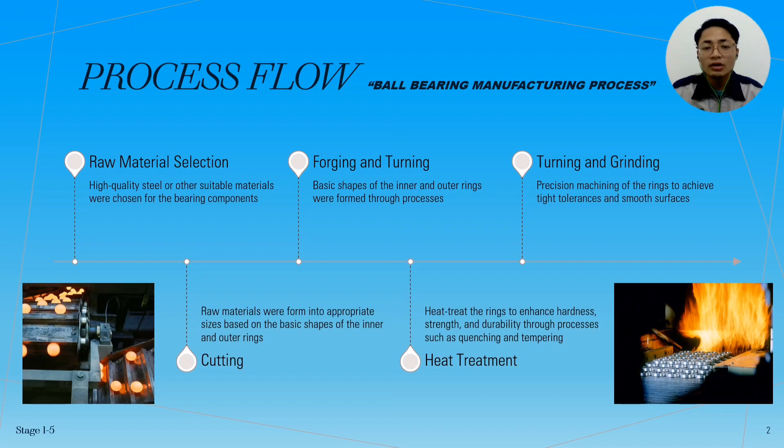The ring undergoes turning and grinding operations, achieving tight tolerance and smooth surface, and the use of coolant during grinding is one of the key aspects in maintaining optimal temperatures and preserving the integrity of the component.

Then they begin the assembly process by bringing together the integral components of inner and outer rings, ball bearings, and cages, and this assembly process is carried out manually by hand. SKF's skilled technicians carefully place the ball bearings into the assembled rings, ensuring even distribution. This step is to guarantee smooth and reliable operation of the bearing.

For those bearings that require it, they proceed with cage installation. The cage serves a crucial role in maintaining proper ball spacing, preventing friction, and contributing to the overall efficiency of the bearing.

To ensure continued functionality of the bearing, they introduce lubrication. This involves application of grease, an essential step in minimizing friction and wear. They also add a layer of protection by sealing the bearings, an extra layer to shield from contaminants and safeguard the internal components.

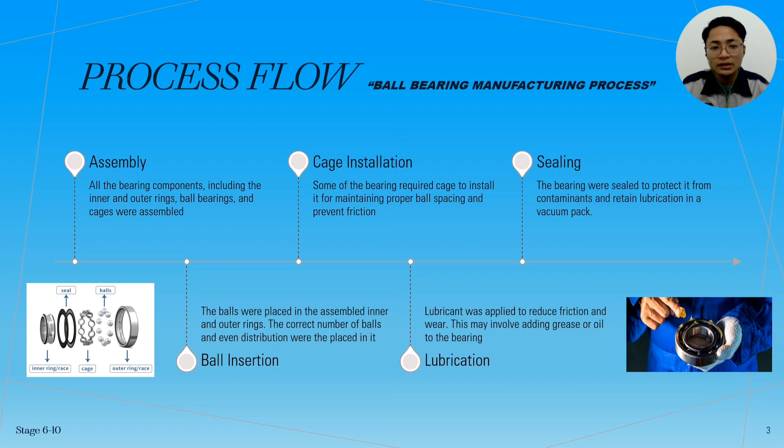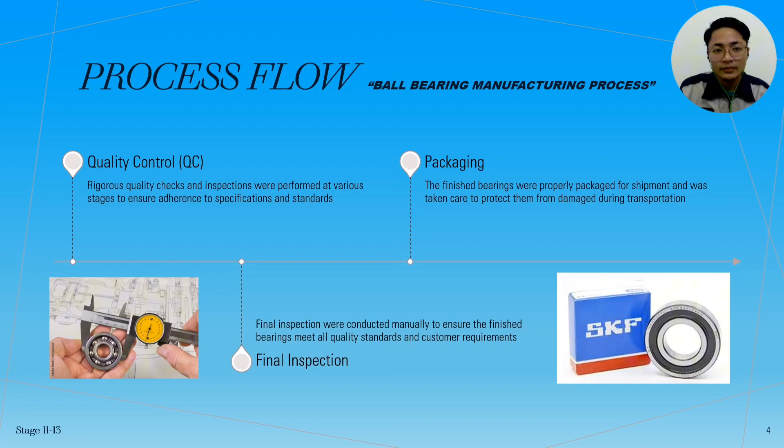Throughout the process, they perform rigorous quality checks and inspections to ensure the specifications and standards set by the company are obtained. In the final stage, they manually inspect the product themselves, and after that continue with the packaging process to shield it from potential damage during transportation. This is basically the complete assembled product of a ball bearing, stage by stage, as you can see in the picture.

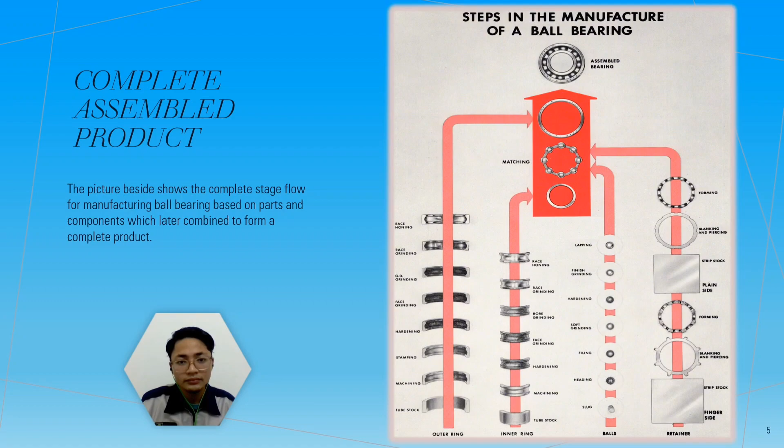For design concept, SKF designs bearings tailored to specific applications based on customer demands. For precision manufacturing, they include advanced machining to achieve tight tolerance and surface finish for optimal performance. For environmental consideration, they also use eco-friendly material and reduce waste as much as possible.

For quality assurance, they use a Tateyama machine for vibration testing of the bearings, and also implement strict material traceability to track the origin and characteristics of the component, such as serial numbers that can locate the manufacturing location and dates. The company also provides training and certification programs for employees to maintain high skill levels and ensure consistent quality in manufacturing. That's all for me, thank you.

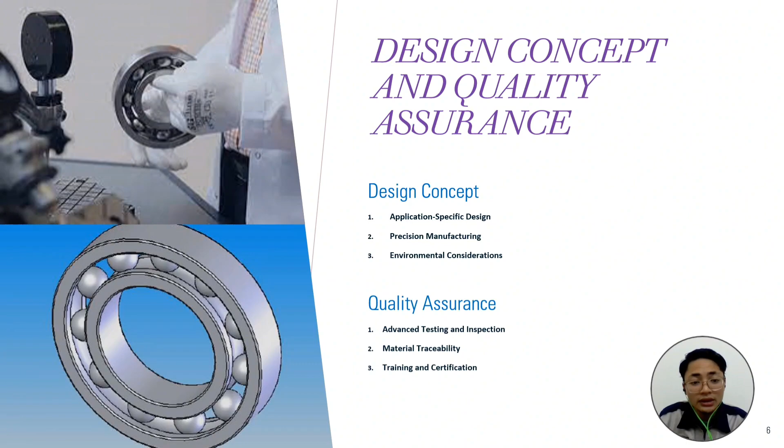My name is Muhammad Syamil bin Nazri, and I would like to talk about the SKF products. Their main product is the split roller bearing.

The design of SKF's split roller bearings makes them beneficial for inaccessible applications where mounting, dismounting, and maintenance is a challenge, for example between the head pulley and gearbox or motor. They are also highly suitable for long shafts which require support at several positions, or on cranked shafts. Split roller bearings are the ideal solution to reduce machinery maintenance and repair downtime. They are typically mounted in a cartridge that fits into different kinds of housings, yielding a complete unit.

SKF Cooper split bearing units can be disassembled into smaller components, easing the task of lifting and handling and making mounting or replacement simple even in the most cramped and inaccessible conditions. Clearances are preset, so there is no requirement for any on-site adjustments or specialized fitting tools.

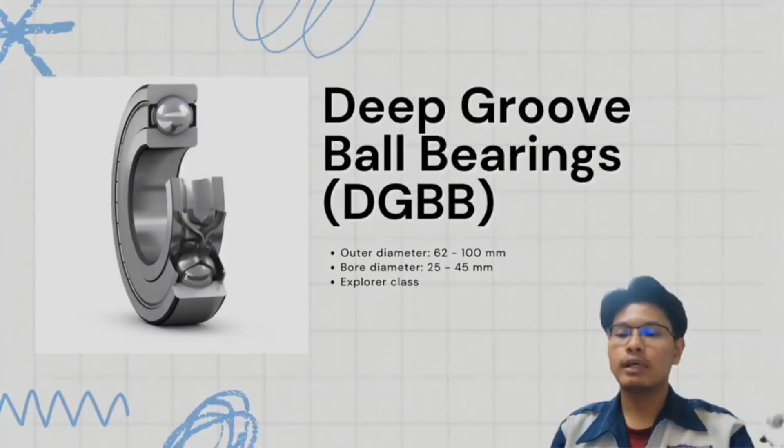Deep groove ball bearings are the most widely used bearing type and are particularly versatile. They have low friction and are optimized for low noise and low vibration, enabling high rotational speeds. They accommodate radial and axial loads in both directions, are easy to mount, and require less maintenance than other bearing types.

Self-aligning ball bearings have two rows of balls, a common sphere raceway in the outer ring, and two deep interrupted raceway grooves in the inner ring. They are insensitive to angular misalignment of the shaft relative to the housing, which can be caused, for example, by shaft deflection.

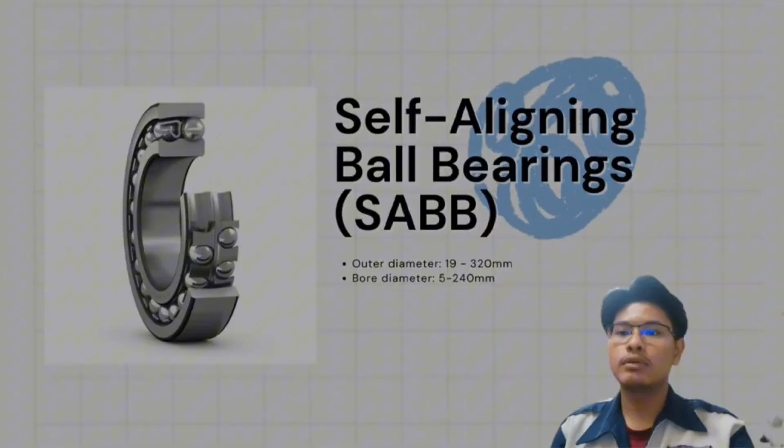Spherical roller bearings can deal with heavy radial and axial loads in applications prone to misalignment or shaft deflections. This type of bearing has a high load carrying capacity, and the ability to accommodate misalignment helps to obtain low maintenance costs and a long bearing service life. The assortment includes spherical roller bearings designed for many applications, including wind turbine main shaft, continuous casters, vibratory applications, and high-speed applications, as well as bearings with solid oil, split bearings, and many more.

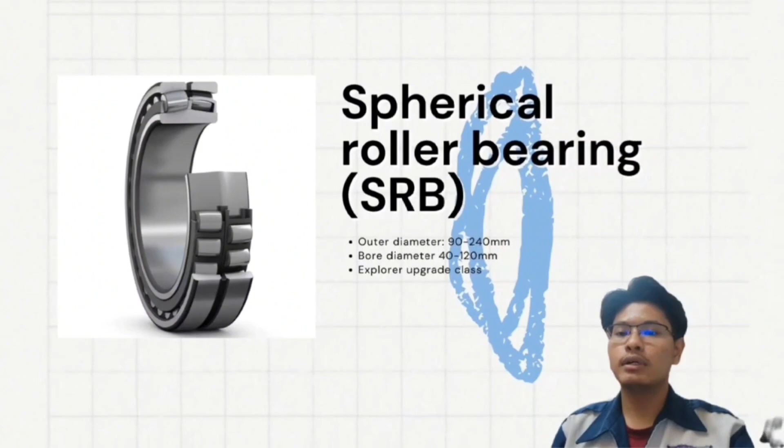So, bearings are components that aid in the rotation of objects. Inside the equipment, they support the shaft that revolves. Automobiles, aircraft, power generators, and other devices need bearings. Even common household items like refrigerators, vacuum cleaners, and air conditioners we use daily contain them.

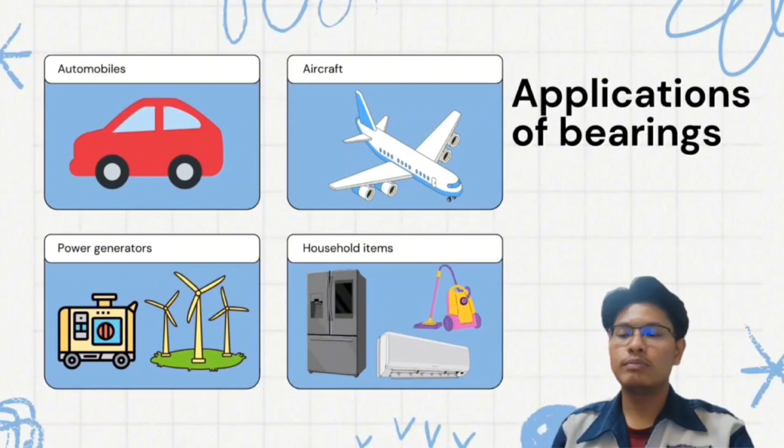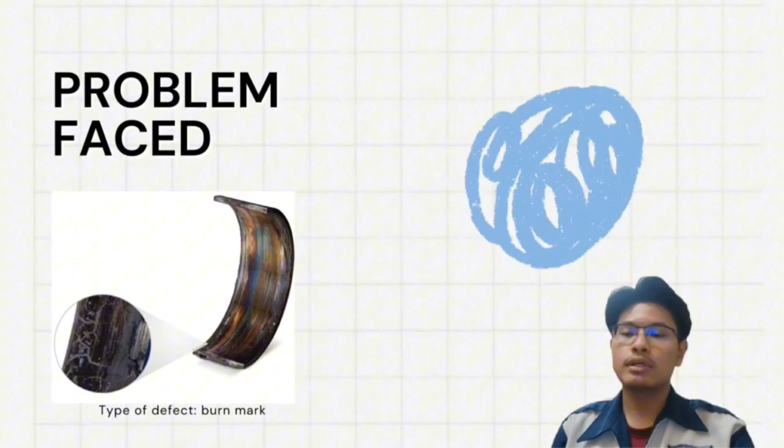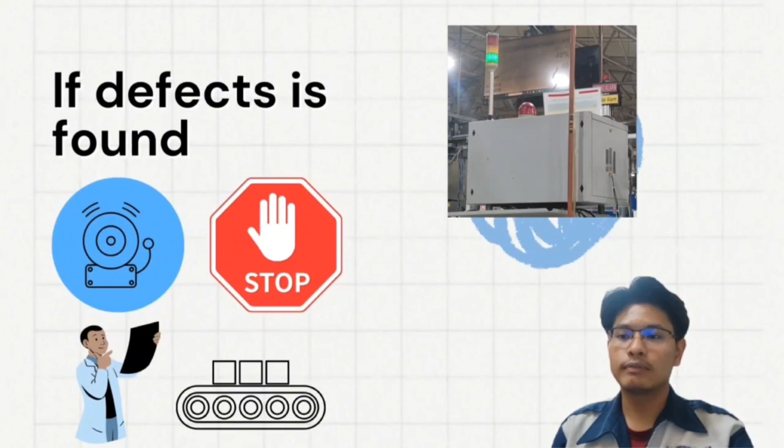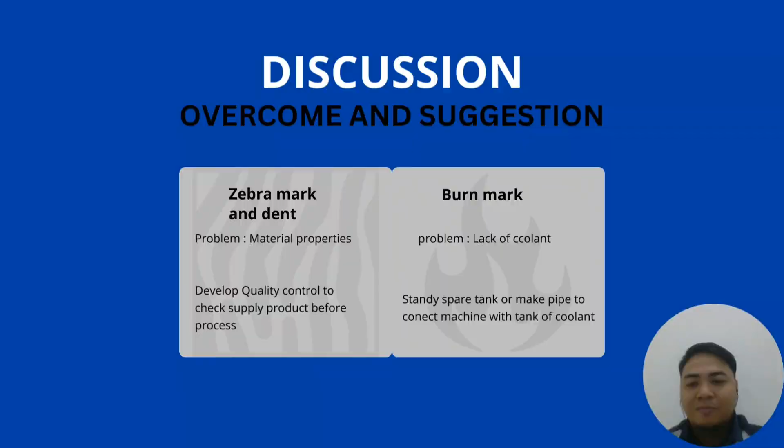Continuous quality improvement is essential in the bearing industry to enhance technology, product performance, and overall customer satisfaction. Here are some strategies and practices for implementing continuous quality improvement in the bearing industry.

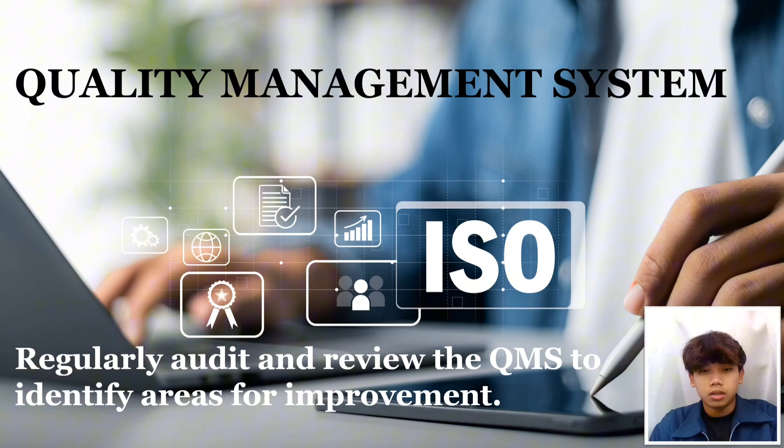First is the quality management system. Establish a robust quality management system that complies with international standards such as ISO 9001. Regularly audit and review the QMS, the quality management system, to identify areas for improvement.

Next, data analysis and monitoring. Implement a comprehensive data collection and analysis system to monitor key performance indicators such as defect rates, failure modes, and customer feedback. Utilize statistical process control tools to identify trends and patterns.

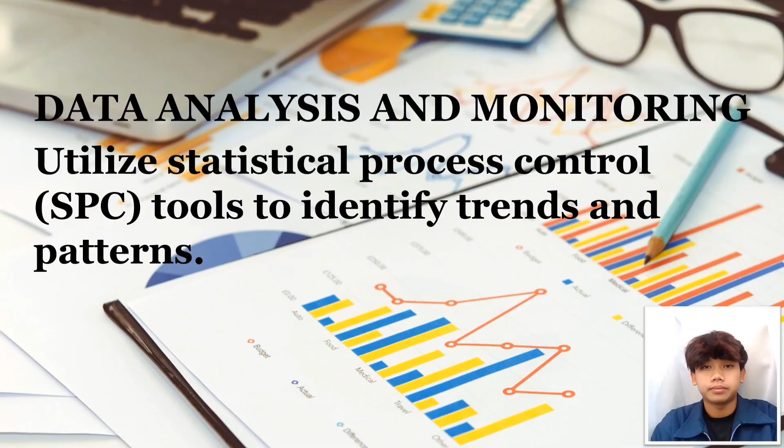Last but not least is continuous training and skill development. Continuous training and skill development are imperative for staff because they enable employees to adapt to technological advances, enhance their performance, engage more effectively in their roles, foster innovation, management, and compliance. They also provide competitive advantages, elevate customer satisfaction, and support both personal and professional growth. All companies in the world invest in ongoing training programs for employees to keep them updated on the latest technologies, quality standards, and best practices. This ensures a skilled and knowledgeable workforce.

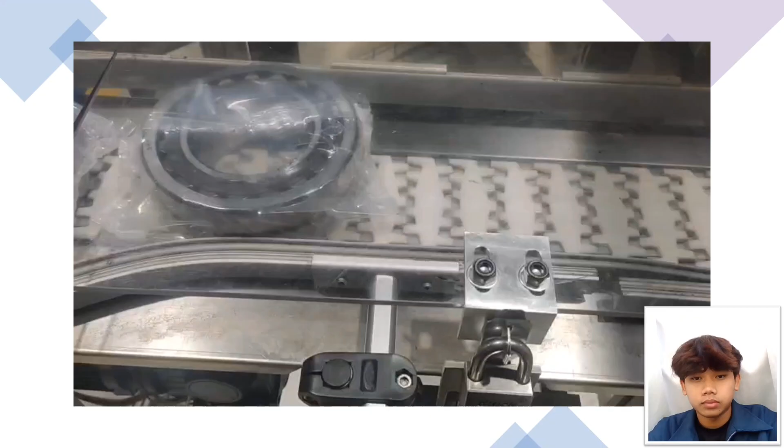This is one of the processes that SKF Malaysia does in the factory. This is the final look after the bearing has been packaged and needs to be delivered to the user. So that's from us. Thank you.